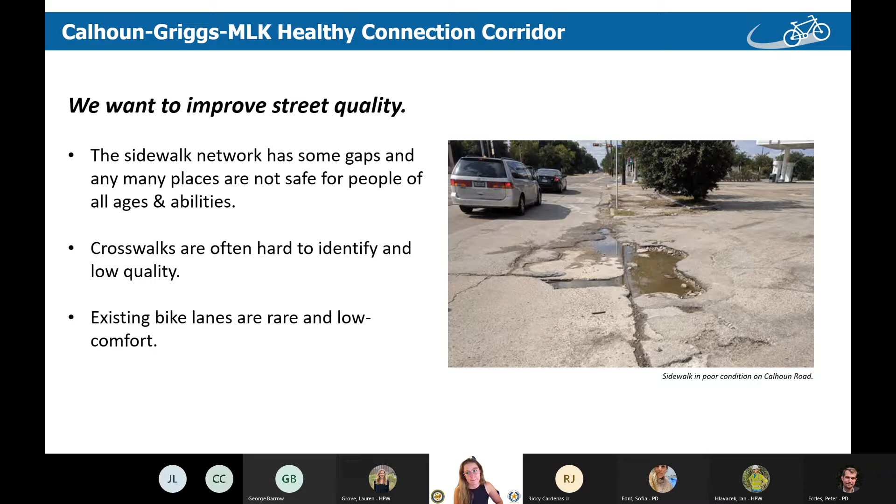We want to improve access to transit with this proposal. The corridor contains a great deal of transit use, especially along the high-frequency MLK Lockwood bus line. There are multiple transit centers and connections to the Metro Rail Purple Line. However, most bus stops are not comfortable or pleasant to use, and due to many unmarked crossings at bus stops, they may be difficult or unsafe to access.

This proposal will address street safety, street quality, and improve transportation in a variety of ways like sidewalk and curb ramp improvements, new and restriped crosswalks, intersection improvements, protected bikeways, and rebuilt better placed bus stops.

Now I want to show you some examples of what the changes on the corridor will look like. At intersections, you'll see shortened crossing distances, restriped crossings, improved signal timing so all users can safely move through the intersection, and new curb ramps, which will allow users of all mobility levels to move between the street level and the sidewalk.

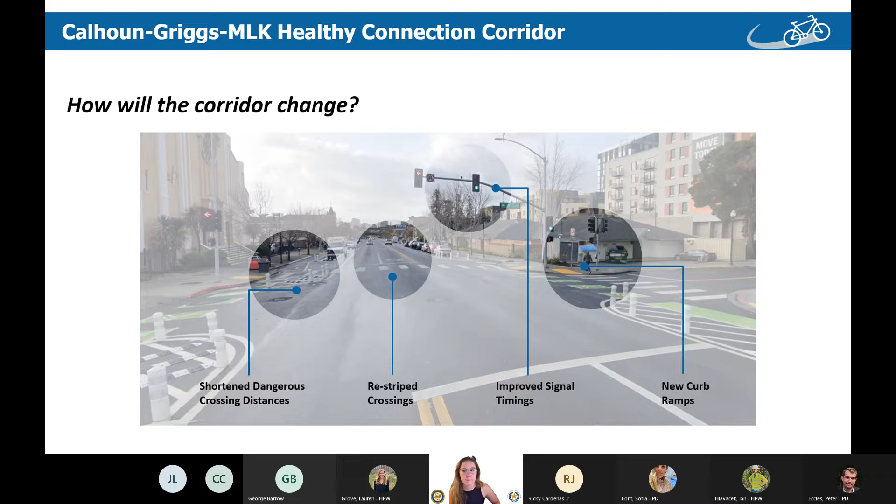All new bus stops will be rebuilt to current Metro standards for safety and comfort. At many bus stops, new crossings will be added to increase safe access to transit. Along the corridor, bus stop locations will be optimized to increase the reliability of the bus route. Floating bus stops, like the example on the right, like on West Cavalcade, will be implemented on MLK Boulevard to improve safety for transit users and those using the bikeway. These floating bus stops will also improve reliability of the bus route by limiting unnecessary stops and conflicts.

We're going to get into some of the features of the bus improvements later when we talk about MLK as a Metro Boost corridor also.

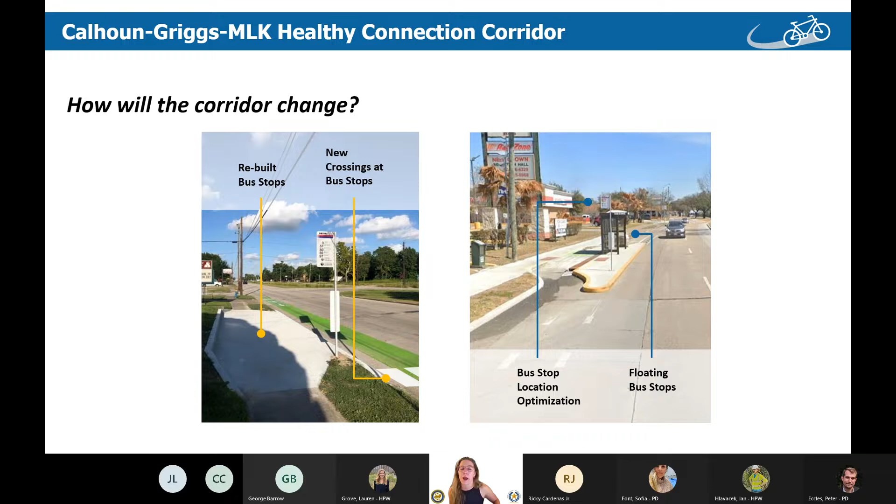So far, since July, we have been doing some engagement and outreach, and we have attended a couple community events and community organization meetings. We have really enjoyed sharing this proposal and have already received valuable feedback about the plan and the corridors themselves.

Okay, so now I'm going to move into going through the segments, and this is the part where I might click through some slides relatively quickly because we can always come back to them and dig into them in the Q&A portion. Starting with Calhoun Road as the first segment, the layout generally is one lane in each direction with either parking on the edges or a center turn lane.

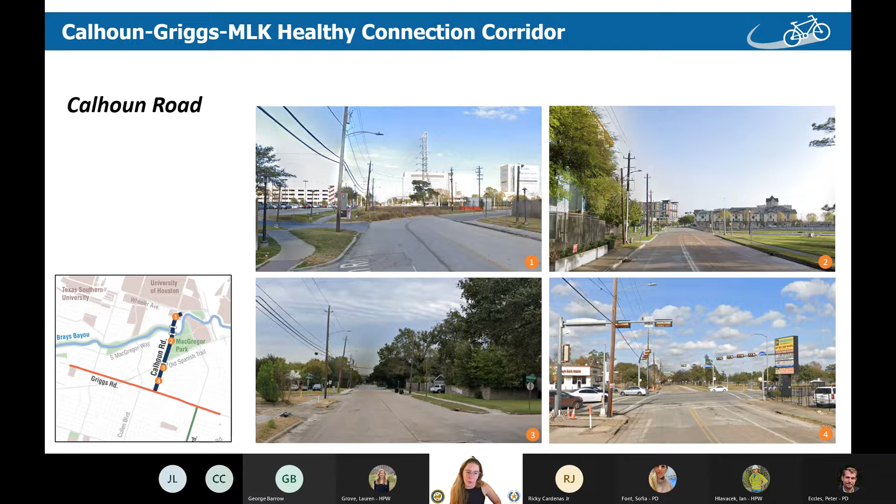For each street in this proposal, I'm going to go through what the typical street sections look like. I have all the sections available to me in the feasibility study, so I can pull them up after this if we want to dig into one that I haven't shown. But for the sake of time, I've limited them, so we just look at what a typical section on one of these roadways will look like.

So on Calhoun Road between Brays Bayou and Old Spanish Trail, it's proposed that the parking and the existing low comfort on-street bike lane will be converted into dedicated, protected, buffered bike lanes, as you can see here.

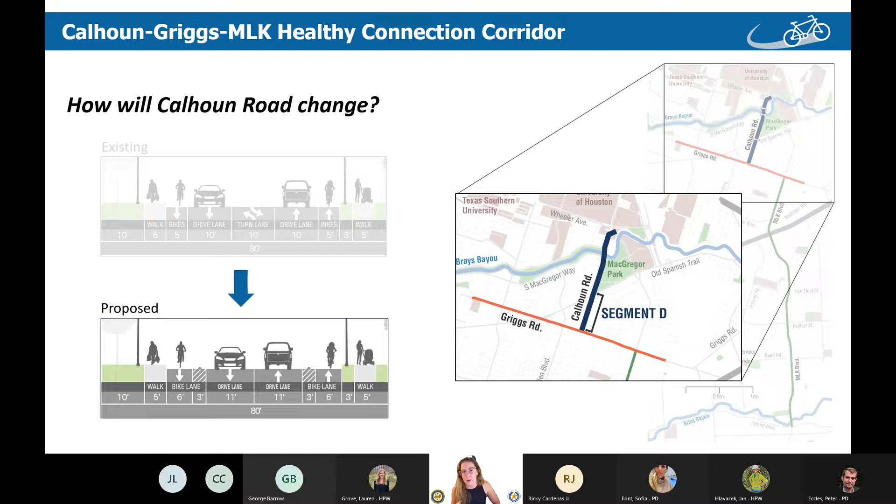On the segment to the south, a similar treatment is proposed on Calhoun Road, where the center turn lane and the low comfort bike lanes will be removed and converted to high comfort, protected, buffered bike lanes on the edges.

Next, we'll move to Griggs Road. Griggs Road is the road in this plan that has the most variability throughout the corridor. It starts on the west side as kind of a residential, low traffic volume, low speed street. But as you move eastward, as you get closer to OST and MLK, the number of lanes increases.

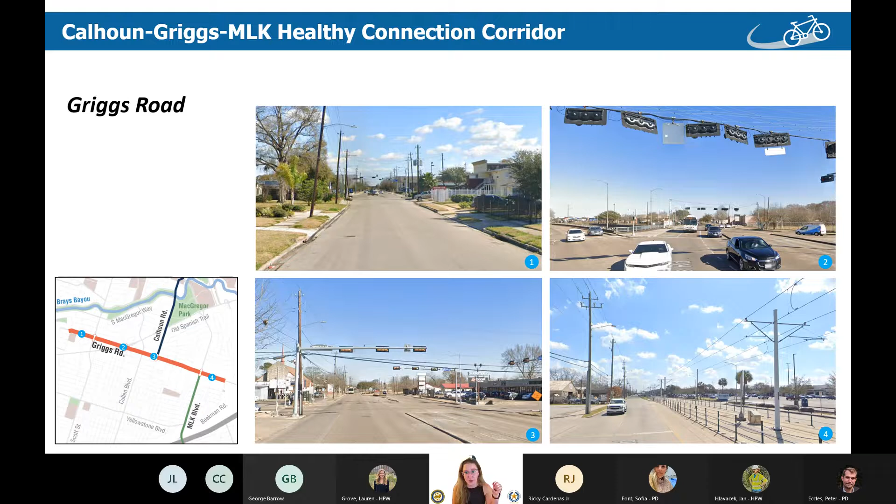The speeds traveled tend to increase, and the traffic volumes increase. Griggs is a very important corridor for commercial, residential, and community activity, and we see all types of road users here: walking, biking, driving, and taking transit.

And then lastly, this segment that I wanted to share because it's a bit different due to the light rail, between MLK and the Palm Center Transit Center. Instead of changing any of the on-street layout, the recommendation, as you can see on the right-hand side of the section at the bottom, is that the sidewalk would be expanded to a 10-foot wide shared use path that would allow walking, biking, rolling all along it together with enough room for that to be done safely.

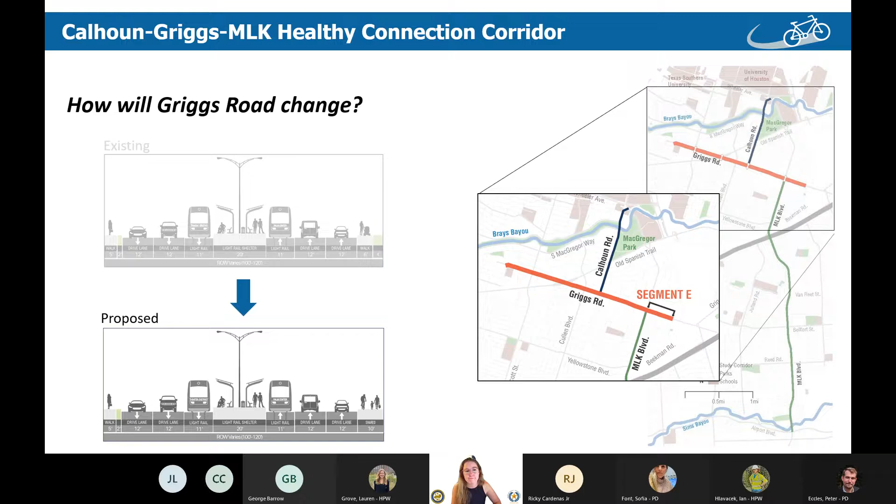However, through the feasibility study, it was confirmed that level of service would be maintained at an acceptable level, even with this conversion. And in fact, due to the intersection with MLK and the signal timing there, there's a likelihood that this number could be improved as the signal timing is improved because of the way the light rail moves through there. I don't know if you've ever gotten stuck at that intersection, but there's a chance to even improve how traffic flows through that intersection and corridor.

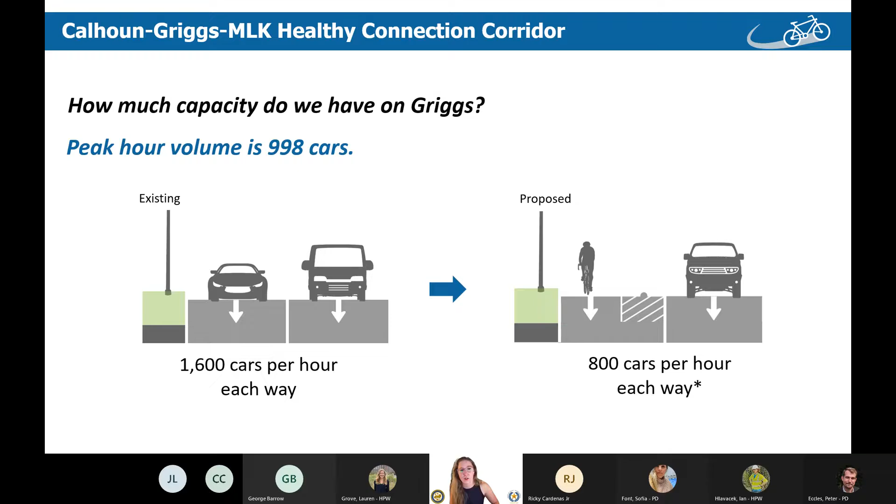Lastly, we'll go through MLK. MLK remains quite consistent throughout its corridor, at least through Griggs to Bellfort, and then through Bellfort to Sims Bayou. It has a bit of a different layout, but from Griggs to Bellfort, it's 3 lanes in both directions, separated by a median, with quite high levels of traffic and quite high speeds.

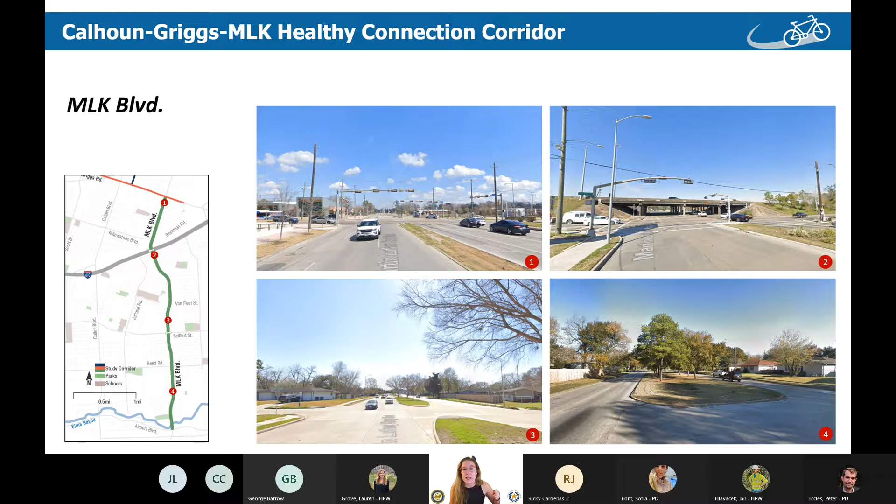Though it is an important connection to residential districts and there are businesses located throughout the street. MLK south of Bellfort narrows to 2 lanes in each direction with a significantly wider median lined with beautiful trees. As you likely know, that area south of Bellfort does experience significant drainage concerns, and drainage improvements will have to be the first step to any safety improvements for that segment of MLK from Bellfort to Sims Bayou.

So segment B, which is the segment from 610 to Bellfort, the recommendation is for a conversion of one lane to be a protected buffered bikeway. This is what we're going to see. This is the proposal all the way from Griggs to Bellfort.

And then from Bellfort south to Sims Bayou, there is an exciting idea to create a shared use path in the center that here is shown as 15 feet wide. I think it would be a really exciting idea, but as I just mentioned, this area needs serious drainage improvements, so that would have to come first before anything could be installed in the median, like a shared use path that we'd love to see.

Lastly, for MLK, I'm going to share a quick video about what a boost corridor is, because MLK will be getting the boost corridor treatment. So let's just watch this for just a second.

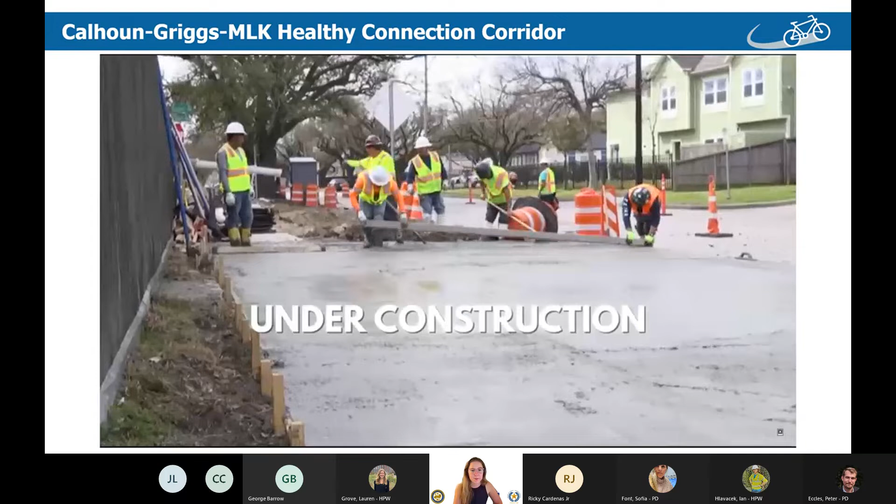So I will just say this boost corridor is a program that comes from the METRONext program to improve the walk, the stop, and the ride on these high bus traffic routes across the city. So MLK is on the list to get these improvements, as is Scott Street, which is a street to the west. We can talk more about those improvements in the Q&A section.

And then lastly, for MLK, I'll share that same slide about traffic volumes. That peak hour volume on MLK is between 610 to Bellfort, and it sees about 1,200 cars in an hour at that peak hour volume. However, with 2 lanes of traffic in each direction, we expect that MLK will be able to still maintain a capacity of 1,600 cars per hour, so it will be well under capacity with this proposal.

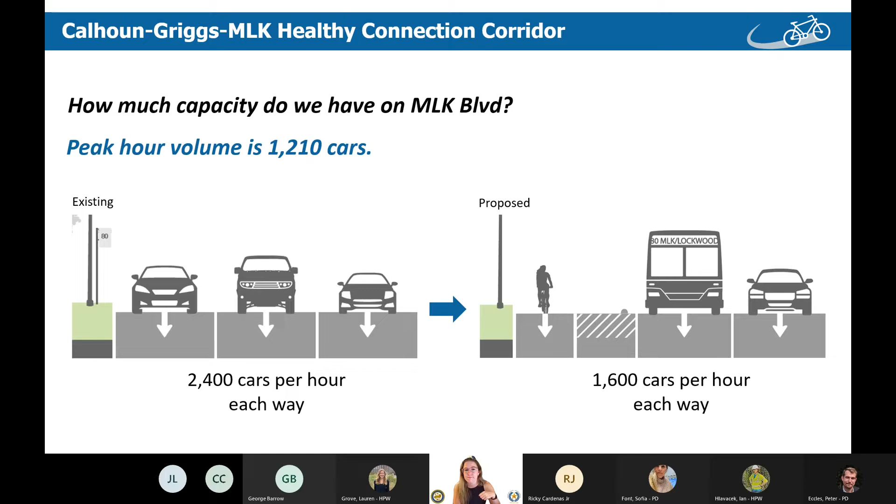And now I just wanted to go through and note some of the questions we've gotten throughout giving this presentation in the last few months, because we have addressed these on the Let's Talk Houston page that we'll share in the chat, but we're also more than happy to talk about them here with everyone.

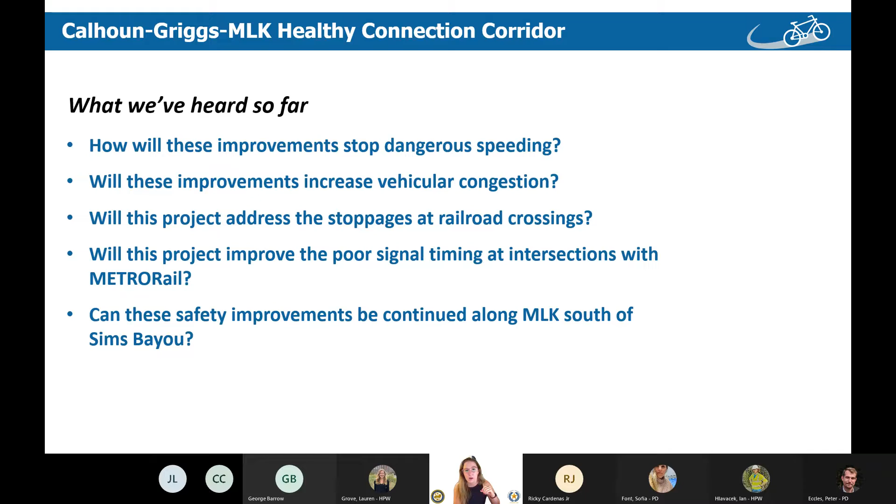So how will these improvements stop dangerous speeding? Will these improvements increase vehicular congestion? Will this project address the stoppages at railroad crossings? Will this project improve the poor signal timing at intersections with Metro Rail? And can these safety improvements be continued along MLK south of Sims Bayou? We can certainly get into those questions and answers in the Q&A.

And then I wanted to give you some updates since the last time I presented this information. First and foremost, in the current plan, the design and construction is going to end at MLK and Bellfort. Due to those significant drainage improvements that I mentioned, the installation of a shared use path cannot happen until those improvements are completed. So currently we're only thinking about Calhoun, Griggs, and MLK from Griggs to Bellfort as part of this design and construction.

The next question, can these safety improvements be continued along MLK south of Sims Bayou that I mentioned before? We were recently told that Gulfgate TIRZ 8 has authorized a feasibility study for MLK from Sims to Orem, and that's going to include an evaluation of the drainage along that corridor. So we're really excited about the opportunity for these improvements to extend further south and make a much longer north-south connection.

And then lastly, the Calhoun segment is the first one going through the design process, and it is currently at 60%. So there are ongoing conversations with UH about the trail segment that's going to connect Calhoun to Wheeler, which we can look at a proposal for that. But it is moving through the design phase. So any feedback on that would be great, because soon enough it will be at 100% design, which we're really excited about.

And then lastly, just a little timeline. We started doing outreach back in the fall, in the early fall, maybe late summer. Right now, we just did a community bike ride and a virtual public meeting tonight.

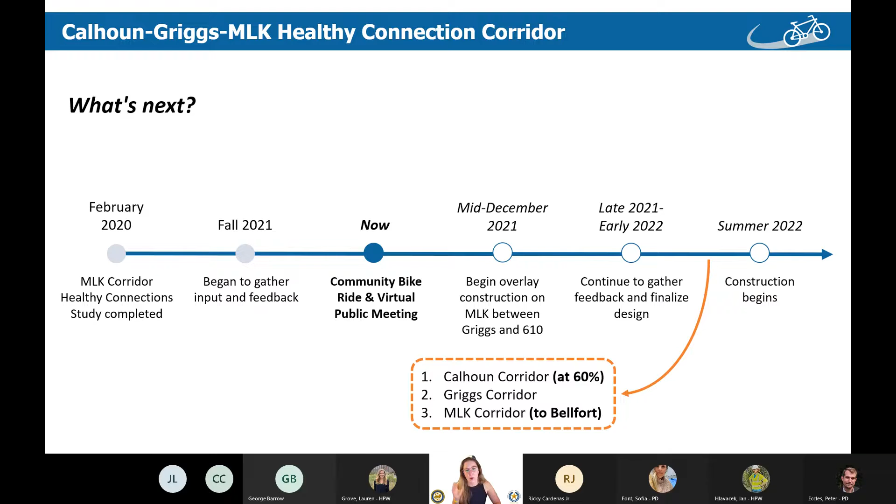To that note, the order of these corridors and how they're going through design is: Calhoun corridor is first, currently at 60%. Then it'll be the Griggs corridor, and then the MLK corridor, but only to Bellfort, as is what's currently feasible.

So now I ask the question to you: what mobility concerns do you have on this corridor? What safety issues exist where you live or work? And what are we missing from this proposal?

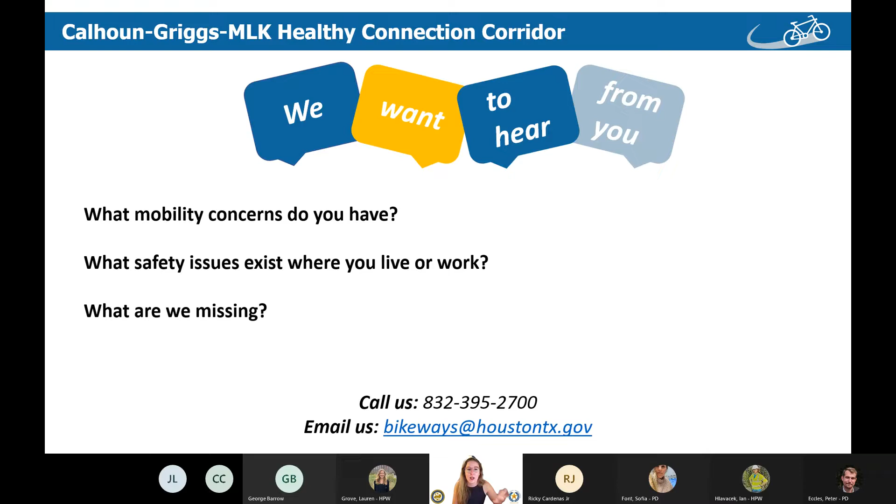And then lastly, this is the link to Let's Talk Houston, the page where we have all of the updates and all of the information about this proposal, including the Healthy Connections study, which really gets into the weeds about every intersection, the traffic counts, the speed volumes, all that good stuff. It also has a place for comments if you want to comment publicly there.

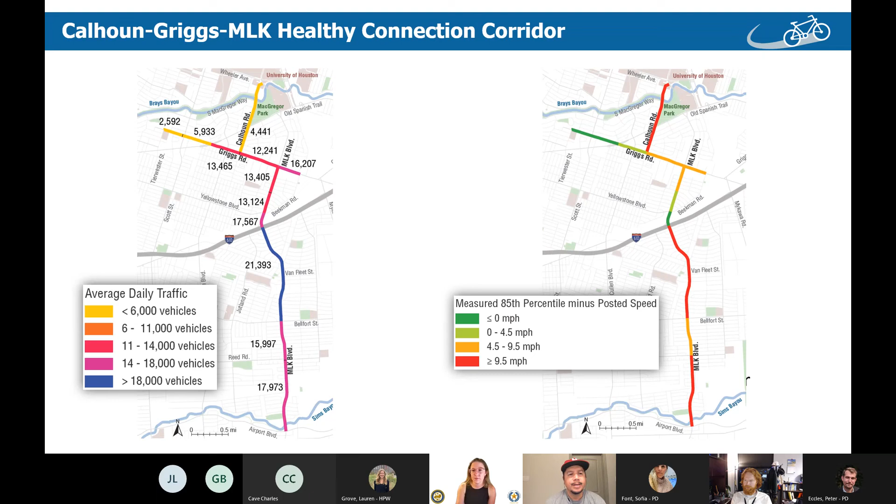Yes, go ahead. So it's related to the project, but not directly. I guess it's just kind of a bike lane question in general. Are you guys working with, or whoever's in charge, are they working with anyone to make sure that parking doesn't occur in these new lanes? I'm not sure how much parking is on those lanes currently, but it's just kind of sad to see that, driving through the city, even downtown on Lamar Street, like passing by the Four Seasons, I see Houston police officers parked in the bike lane. It doesn't make sense. So I'm wondering how are you guys addressing that, or whoever's in charge, how's that going?

I don't have a great answer for you. Enforcement is a really important part of maintaining our bikeways as safe and usable for everyone that wants to use them. It is illegal to park in them currently, and when these are constructed, it will be illegal to park in them. I will say the benefit of these, and I'm sure maybe some of my colleagues have something to add, but the benefit of these is they will be curb separated rather than armadillos or something else. So they'll be a little harder to mount and get into. And at any points where the entrances would be wide, we're going to look into vertical delineation that we can do, things that we can do to very clearly indicate to someone in a car that it is not accessible for them. So in the design, we will do those things.

As for enforcement, it is an ongoing struggle. I don't know if Ian or others have something to add to that. Lauren's turned her camera on.

I think as the bikeways come on board, like right after construction is roughly complete, we try to work with Park Houston, who helps us with enforcement, that hey, there's this new infrastructure here. With the no parking in the bike lane ordinance, they can ticket people without any no parking signage. So that's where we're at now. It's just a matter of making sure they're aware of the new facilities in the area to be on the lookout for, and we're trying to do a better job of keeping them informed when we're rolling out bikeways. So ongoing partnership with them and making sure they're looking out for it too, to make sure that enforcement happens. That will be the case with this project as well.